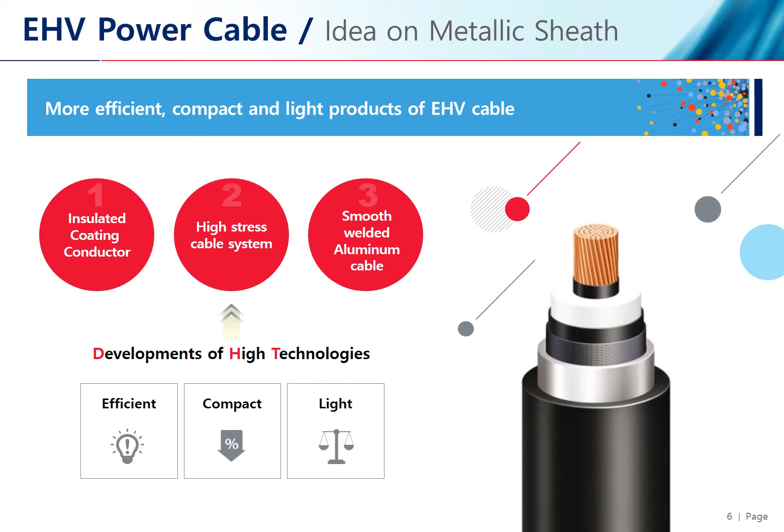So in order to satisfy our clients, we are at the front of the development of insulated coated cable, which is enamel wire, a high stress cable system, and new cable sheath types such as aluminum cable sheaths. Lead sheath has high resistance. The problem is that it is very heavy and also very toxic to the environment. Copper wire stranded cable with laminated tape might be light in weight and small in diameter, so it is very easy to handle. However, the expensive price might be the challenging point of this cable.

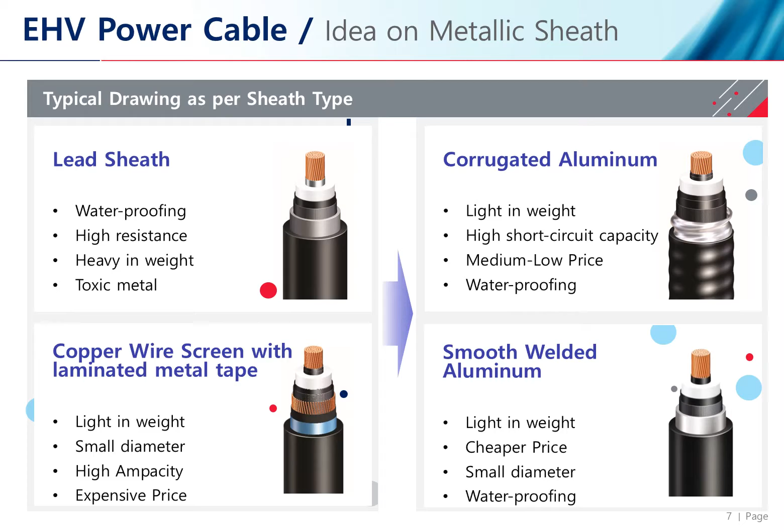On the other hand, aluminum sheath type cable might be very price competitive and light in weight in general, and the performance might not be so inferior compared with conventional sheath type cable. Let's compare more specific items. Smooth welded aluminum sheath cable might be the lightest cable in weight. Copper wire is the lowest in waterproofing, but all other cable types have very similar waterproofing characteristics. Lead sheath is the only less eco-friendly sheath type, and all other sheath types are very eco-friendly.

As for the diameter of the cable, only aluminum corrugated cable might be the largest in diameter, but all other cable types are very similar in size. This index is from 380 kV, 2,500 square millimeter cable. Price-wise, as you see, both aluminum sheath types of cable might be more economic than conventional sheath type cable.

As for performance, the copper wire with laminated tape might be the most successful thanks to its lowest eddy current rate, but the aluminum sheath type of cable is also manageable. And as for strength against mechanical impact, the aluminum sheath type might be the strongest.

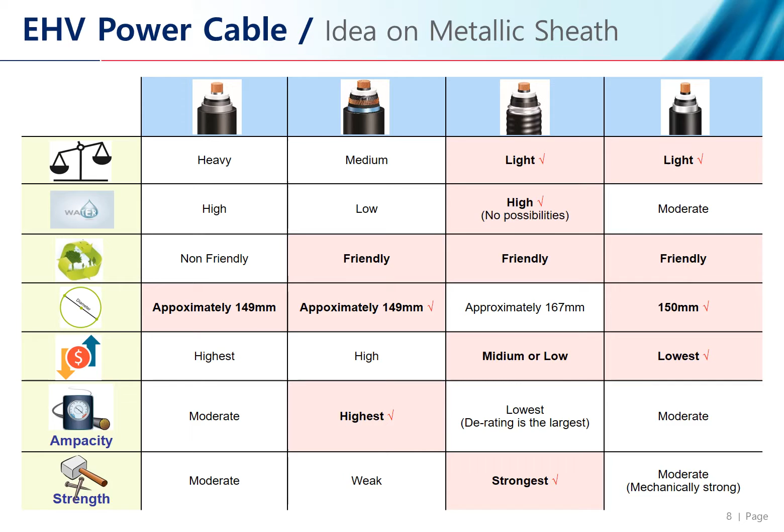And now let's focus more on the price and the performance of the sheath types of cable. As I told you, the aluminum sheath types of cable might be more economic compared with the conventional sheath type of cable, more or less 5 to 15% lower price, lower cost. And as per the performance, the aluminum sheath type of cable is not so inferior compared with the conventional sheath of cable. Of course, the difference of the cost and ampacity might vary according to several factors such as metal price, sheath thickness, or conductor size.

Also, site condition or installation technology might affect differently according to the sheath type of cable. However, from this result, we can consider that the new aluminum sheath type of cable might be a good solution, not too inferior to the conventional sheath type of cable. So only if we can design the grid very carefully, then we can save much time and money thanks to the new aluminum sheath type of cable.

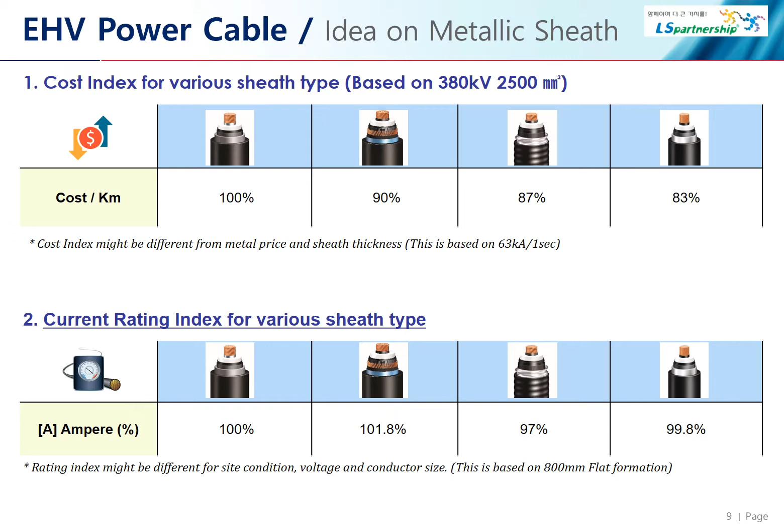Here, as a result, we strongly suggest that it's time to consider aluminum sheath type of cable more generally in GCC countries. More than that, even among the aluminum sheath type of cables, we think that the smooth welded aluminum cable might be a very attractive option in many cases. Thanks to the lightweight and small diameter of smooth welded aluminum cable, we can easily install not only in the direct burial, but in the tunneling system as well.

Additionally, it has good resistance against heat. It is a very good solution, especially in the extreme atmosphere of the Middle East region. So I think it is a very good time to consider how we can make use of this smooth welded aluminum sheath in many cases in the Middle East.

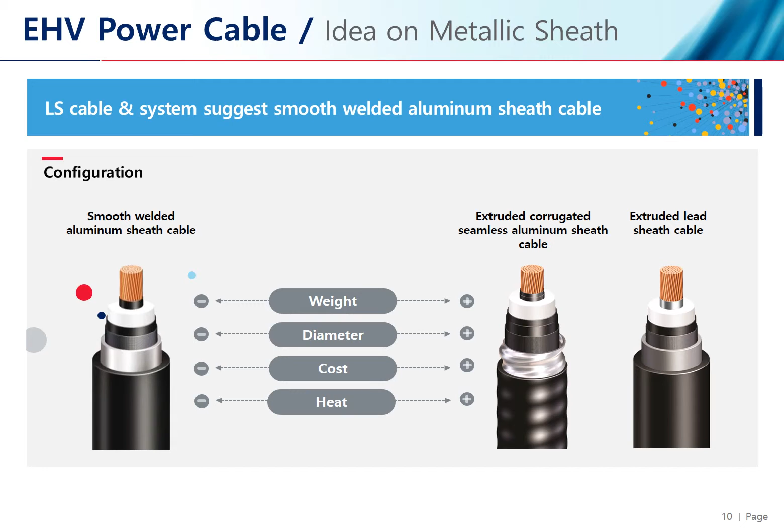Now, I would like to take your interest to the cable itself from the metallic sheath. As you know, usual cable length for high voltage cable for 132 kV or 400 kV in GCC countries ranges from 500 meters to 1,000 meters usually. And our drums, our manufacturing facilities, and our delivery system fit with this length of the drum. However, if we have the ability to manufacture a little bit longer cable length of drum, we have more chances, more benefit and more choices.

It is the reason why LS Cable wants to suggest long length drums of cable, not always, but in some special cases. Assume two cases. The first case might be that there is a narrow strait of the ocean between the land and the island. Or otherwise, please assume that our client doesn't want to make lots of joint bays due to the conflict with third parties or landlords of the properties. Inevitably, in this case, we need to sacrifice lots of budget and time.

In the first case of the narrow strait of the ocean, we need to consider only subsea cable, which costs more for manufacturing and much more for installation. And in the second case, our client or we need to consider bypassing or rerouting the cable route, which might be much longer than our previous plan. However, if we have another option of long-length cable, then we can save time and money seriously.

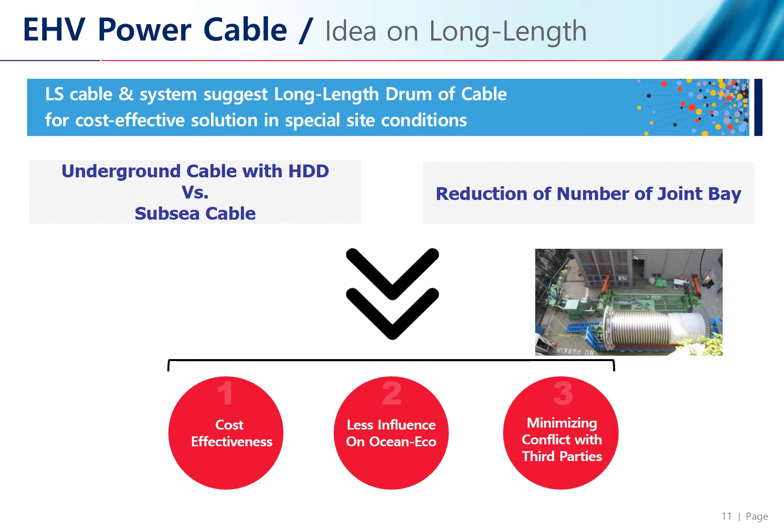Now I would like to briefly introduce our two cases of long-length cable. First is the US 345 kV project. This was conducted on the east coast of the US at Newark Bay. At that time, our client wanted an inexpensive or economic solution for connecting from the mainland to the island. We got to know that the length of the bay is only 1,500 meters. So we suggested 345 kV cable with long length.

And then, as the cable is 2,500 square millimeters and the cable length is 2,100 meters, there are several barriers that we need to overcome. First, instead of land transportation, we need to use the barge directly from the port in the US to the site. Also, we need to consider the submarine factory for insulation because we only have 200 tons of crane in our submarine cable plant in Korea.

For your information, we have two factories in Korea. One is for submarine and the other is for underground cable. And both factories can manufacture underground and submarine cable. I mean, the submarine plant can manufacture underground power cable as well as subsea cable. But the largest crane is only in the subsea factory, so we need to make use of both factories in Korea. As a conclusion, we were successful to deliver, and it is still ongoing, but our client can save money and time and is still very satisfied with our performance.

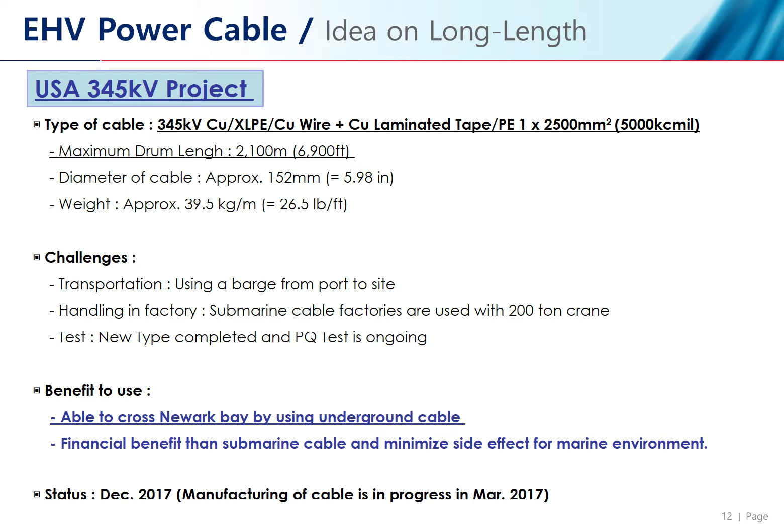Next is the UK cases. I'll make it very brief. Here is the second case. Our client wants to minimize the joint bay because the cable route passes by the property of diverse landlords. So we manufacture 1,800 square millimeter aluminum cable, and the cable drum length is maximum 1,650 and average is 1,500. It means this long length cable is not installed only on part of the cable route, but throughout the cable route.

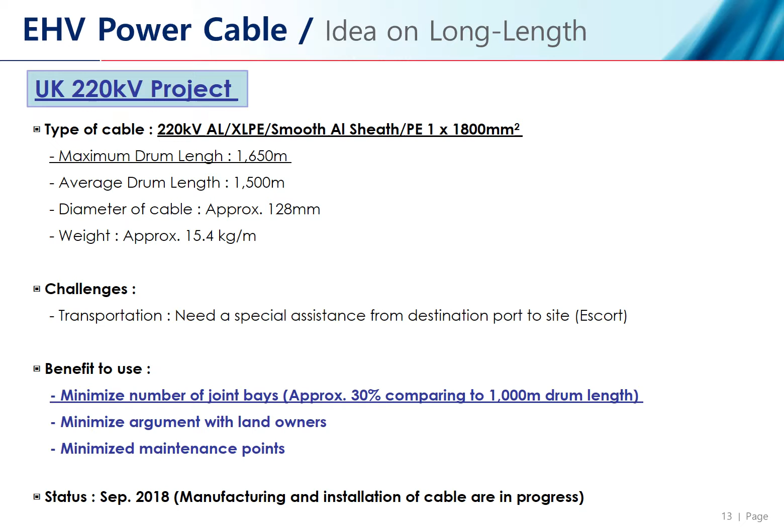Now, let's expand our innovation to large size installation. I'd like to mention the tunneling system here. The tunneling system is gathering more interest in GCC countries, so I think it is a good time to think about tunneling systems more seriously in the GCC countries. Our cable is not operated at a stable load current, and different load current might make different cable temperature.

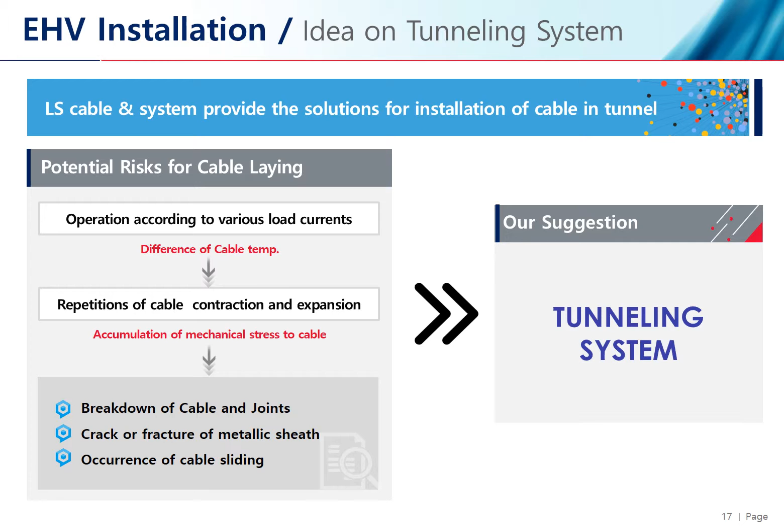And due to the change of outside temperature and the temperature of the cable itself, the cable is repetitively expanded and contracted. This situation will be more serious in the Gulf region due to the extremely hot weather in the summer. All of these conditions will affect the cable very negatively. More seriously, it will break down the cable and crack the sheaths of the cable. More than that, the expected lifespan of the cable might be reduced dramatically. So our solution or suggestion for this might be the tunneling work.

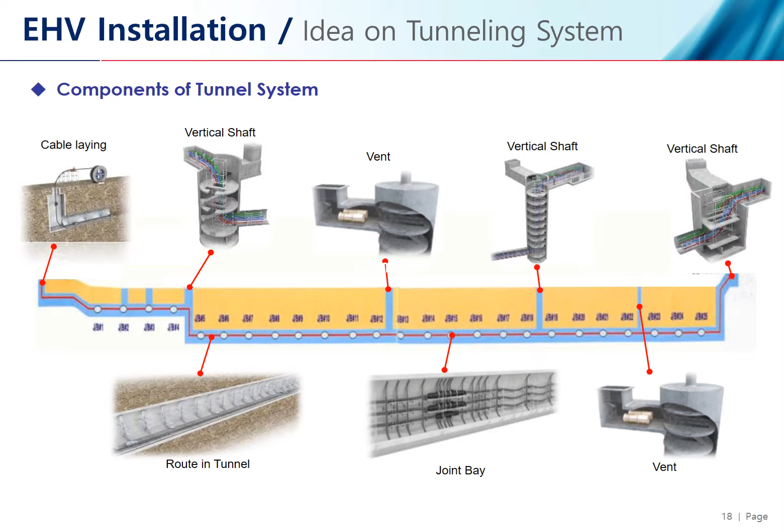This is a general picture of how we install the tunneling system. The tunnel is installed from this point, and cable is installed throughout the tunnel with a regular distance of the joint bay. The most prominent difference between direct burial and the tunneling system might be the regular vertical shaft, which can flow outside air inside the tunnel and expel the heated inside air to the outside of the tunnel.

As for the tunnel mode, our first option of installation might be the snaking installation system. In this system, cable is laid tortuously so that the cable can absorb the force of contraction or expansion due to the heat of the cable. The horizontal snaking cable system might require more space and more equipment because cable is laid side by side, but it is much easier for installation and future maintenance. On the other side, the vertical installation system might need a narrow place, but it will require more specific equipment because it needs to hold the cable in a small area.

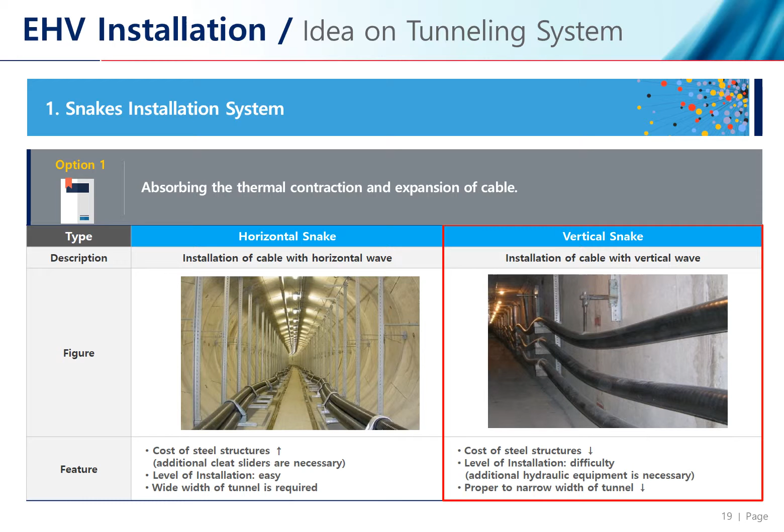Also, we can consider the advanced snaking installation system. We cannot apply this system throughout the tunnel, but we can apply this technology in front of the joint. As you know, the joint is a much more sensitive and critical area of the cable, so we want to minimize the expansion and contraction of the cable, especially in front of the joint. So we lay the cable diagonally, not vertically nor horizontally. Through this technology, we can minimize the thermal expansion of the cable, and it can safeguard the joint.

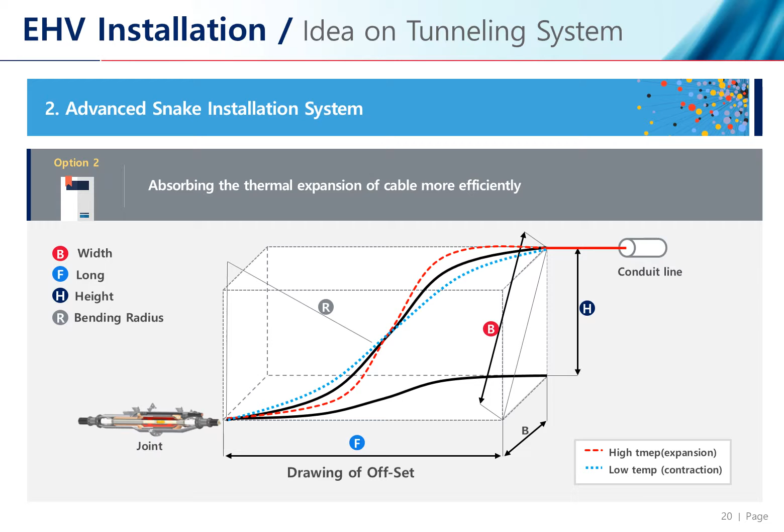Finally, we can consider the rigid installation system. We install the cleats more closely than the regular tunneling system. For your information, the cleat distance in this system is 1.5 meters, while for the vertical or horizontal snaking system it is 6 to 9 meters. This system is very useful when the space is very narrow and we need to hold the cable very tightly without any movement. But it costs very high and it is not so easy to install. We only apply this system in very critical small areas such as substation areas.

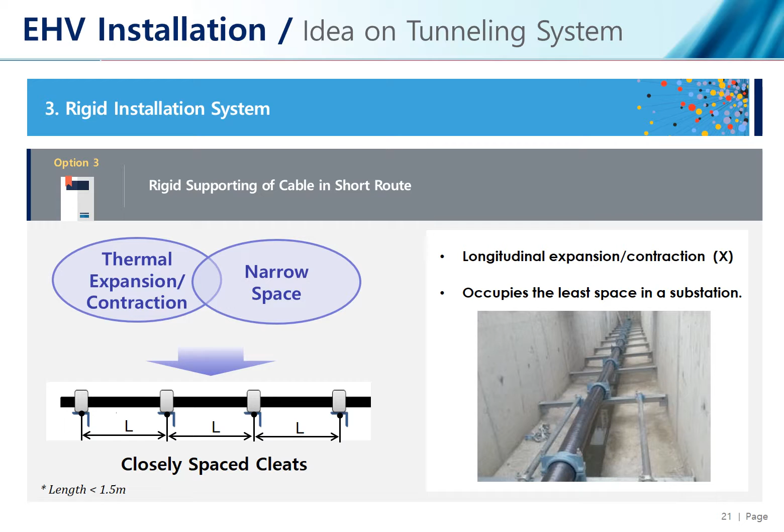Finally, let's think about the ventilation system of tunneling. As you well know, we usually apply a natural ventilation system as well as a forced ventilation system. Ventilation is required due to the heat of the cable during operation.

In order to maximize the operation of the cable, we need to maintain the temperature at a certain level. We usually suggest natural ventilation when the cable current capacity is manageable by the ambient temperature of the tunnel. However, ambient temperature might go over a certain degree, such as 50 degrees Celsius in the tunnel. Then we inevitably consider forced ventilation with an air conditioning system.

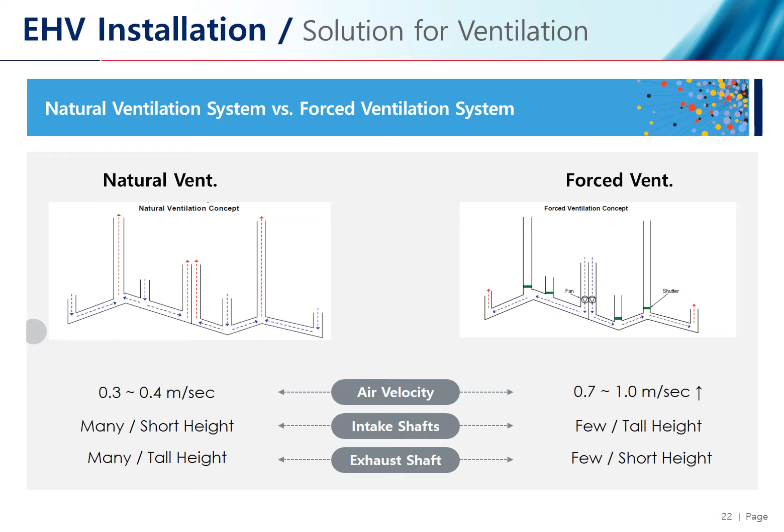As you can see from the chart, air velocity is a little bit higher in the forced ventilation system thanks to air conditioning. This will help to reduce the heat of the cable. Considering that the supply of outer air is very critical for the natural ventilation system, there are many more shafts in the natural ventilation system than in the forced ventilation system. And exhaust shafts are many more as well. However, the shaft is shorter in the natural ventilation system than in the forced ventilation system, and it is very natural.

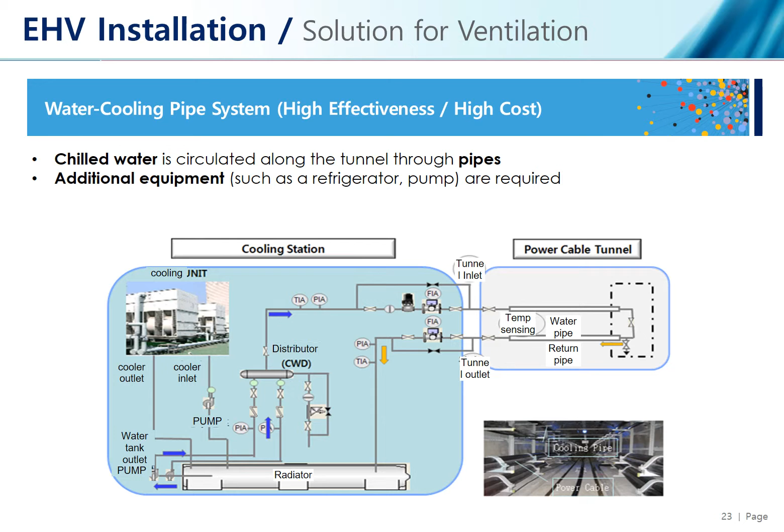Another solution might be the water cooling pipe system. This picture is a brief floor plan of the water cooling pipe system. Along the cable tunnel, we install the cooling station, and from this point, we flow the chilled water through the pipe, which is usually installed just under the ceiling of the tunnel. As you can imagine, this system is the most effective but most expensive solution. So we only use or suggest this solution in a limited area or a very sensitive route.

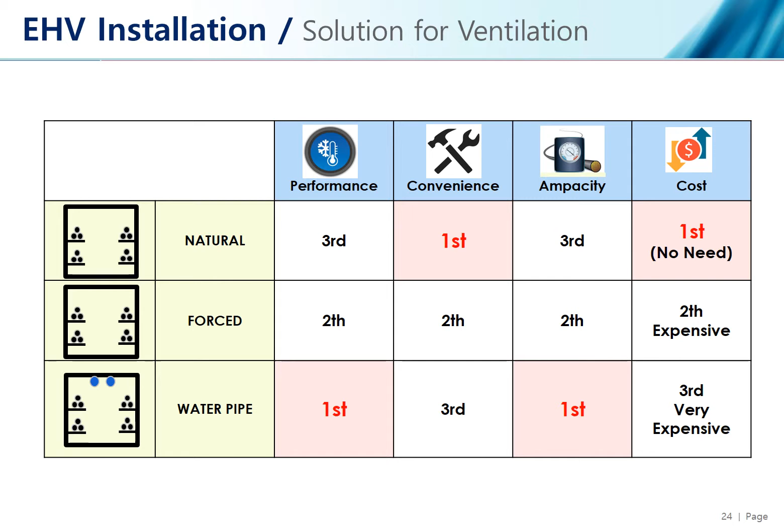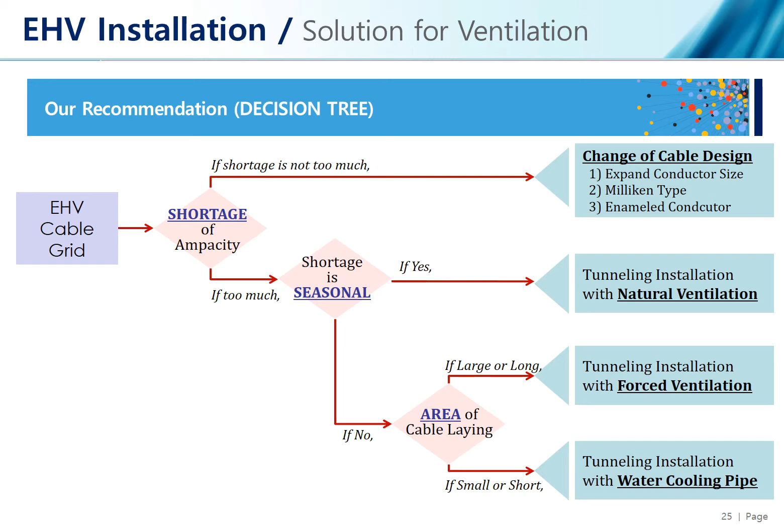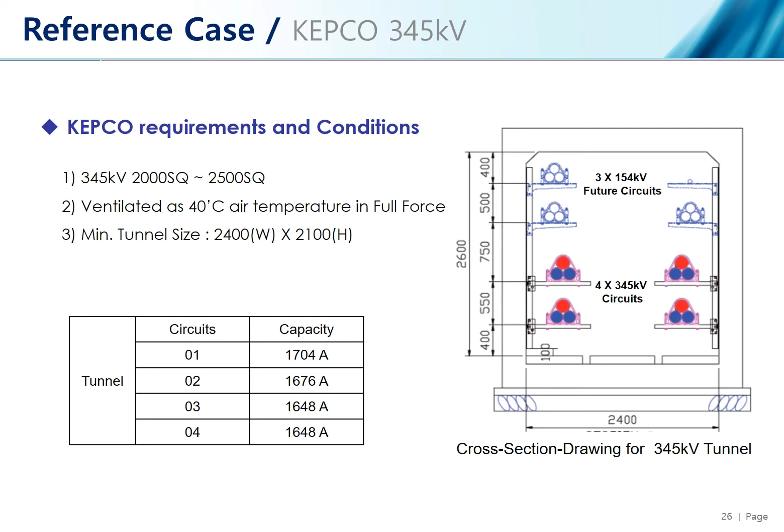I would like to finalize with our experience of tunneling work with our Korean client, KEPCO, Korea Electric Power Corporation. Their requirement is quite severe because they require 345 kV 2,000 or 2,500 square millimeter cable in this tunnel. And they request full ventilation throughout the tunnel under 40 degrees Celsius. Especially, the weather of Korea is very hot, and the route is quite long. So our decision is that we need to combine forced ventilation together with the water cooling pipe system.

So, in the general tunnel, we apply forced ventilation throughout the tunnel so that you can manage the temperature at a certain degree. And at both ends of the tunnel, we apply the water cooling pipe system because both ends are connected to the substation, and the depth of the tunnel at both ends is relatively shallow compared with the middle of the tunnel.

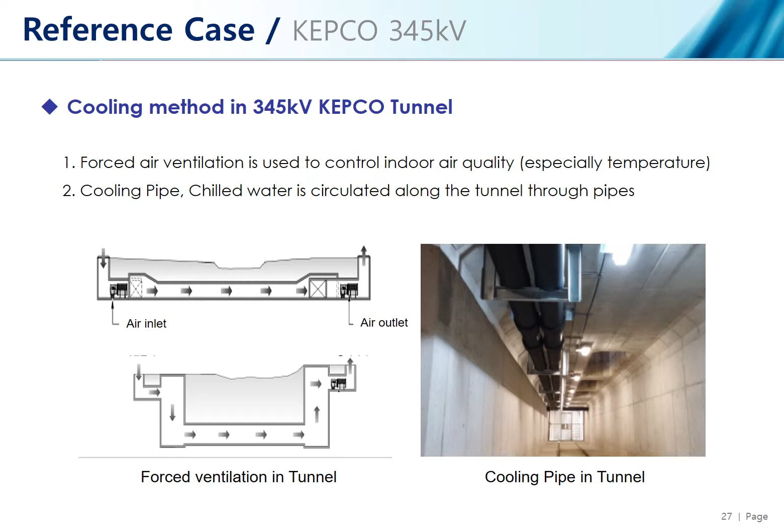Thanks to the enough space of the tunnel, we can easily install a total solution for KEPCO, including communication cable and control cable. Also, we set up the fire protection system, such as sprinklers, fire retardant material and paint, as well as fire retardant FRP foam, which can block the hole.

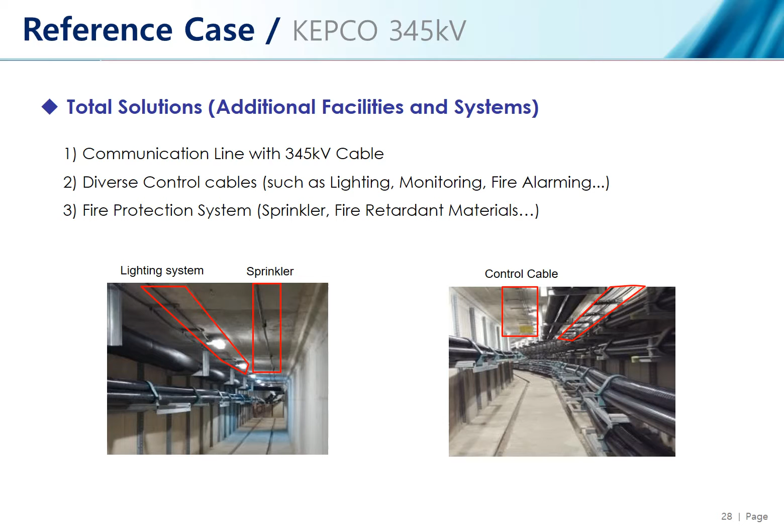Today, I would like to remind you that it is not so easy to develop new technology, but we can rethink our in-hand technology so that we can make good innovation and satisfy our client. It ranges from simple innovation of cable to new ways of cable installation. I have heard some worries about the market perspectives just after 2020 in the GCC region. But I don't worry about the future, because if we have good, diverse, innovative thinking, then we can overcome and make good business opportunities with our properties. And I hope all of us can lead this innovation together.